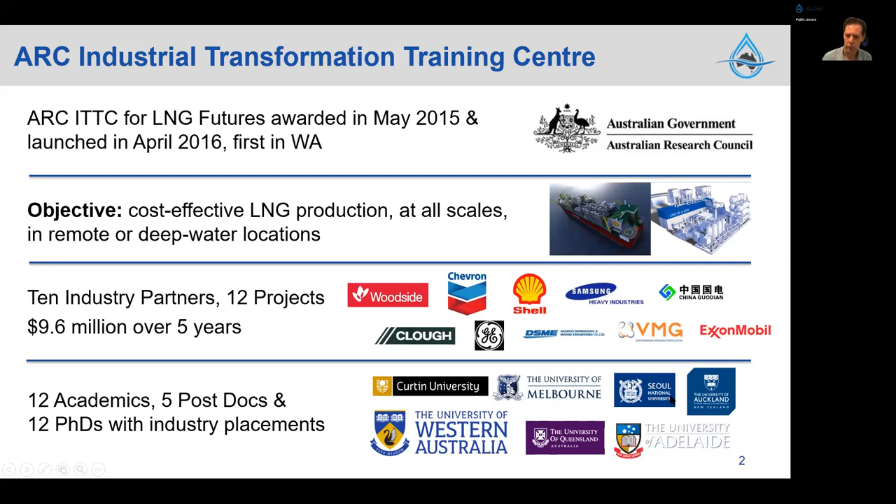Logos are shown here, including a few from overseas: Samsung Heavy Industries and Daewoo Shipbuilding from Korea in particular, and China Guodian, whose name has changed a few times since then but is effectively an energy company from China. We had quite a good collaboration across many Australian and international universities, including with Professor Vishnu Pareek at Curtin University, Professor Paul Webley at the University of Melbourne, Professor Andre Luton at the University of Adelaide, and Dr. Tom Rufford at the University of Queensland, plus Professor Yutaek Seo at Seoul National University and Professor Young at the University of Auckland.

A fundamental part of the mission of industrial transformation training centres is to produce industry-oriented PhD students, and the ARC includes funding for 10 12-week placements of PhD students with an industry partner each year. We decided not to just restrict it to the precise 10, but to actually expand it to a broader cohort of PhD students to maximize the industry training. This has worked quite well, and we've shared this model with the ARC, because often a particular student or a particular set of skills and the partner don't necessarily match at a given time. So having a broader pool is important.

Already we've graduated many PhD students, or those who have just finished or submitted, and a snapshot of some of them is shown here.

We did these 12 projects, and they were grouped into three themes. These were led by Professor Mike Johns and Professor Zach Aman at the University of Western Australia, and Dr. Kevin Li, who's now at the University of Melbourne, led theme 3.

The LNG industry is based on pretty well-established science and engineering, so making progress isn't simple, and you really have to go back and understand fundamentals better than has been done previously to make progress. And then the next important step is to demonstrate that new understanding translates to larger scales. The images shown here of our facilities try to reflect that process, as will the 2 examples I'll talk about this morning.

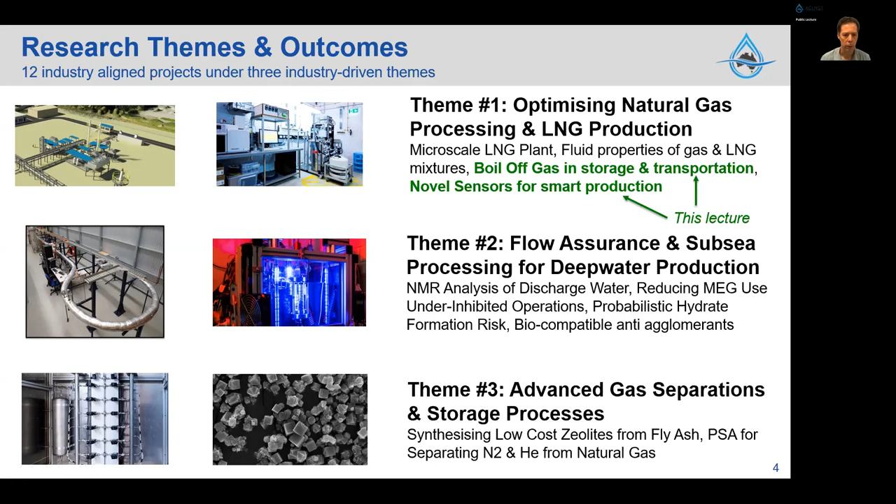There are a lot of projects, and they've all had very strong and specific outcomes that I think will make a material difference. Today I'm going to talk about just 2 of them: boil-off gas in LNG storage and transportation, and novel sensors, particularly for the detection of cryogenic solids in LNG production.

The LNG industry has been going for something like just over 5 decades now, and over that time it's grown exponentially, with recent growth spurts both initially at the beginning of the last decade in Australia, continuing now in the United States. Global capacity for LNG is something like 400 million tons per annum. Karratha gas plant effectively started its first shipments back in 1989, and now has 5 LNG trains and was Australia's first mega-scale plant.

Now we lead the world, just pipping Qatar in terms of about 80 million tons per annum of export. The growth in availability of cheap US gas has driven that second growth spurt, with the United States likely to be challenging for world leadership in LNG by the middle of this decade.

That cheap gas has had 2 big effects. First, the cost of gas, and particularly LNG, is now historically incredibly low, at the level of 2 to 3 US dollars a gigajoule on the spot market, and sometimes there's even been examples this year of it going negative as people couldn't find places to put their LNG. But it's also helped the US in particular reach its emissions reduction target, as people have transferred to gas as a clean baseload fuel that has half the CO2 emissions.

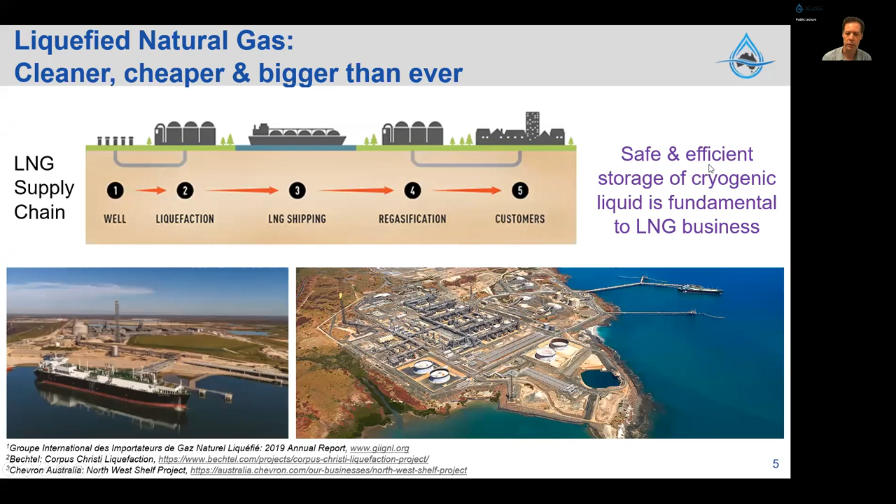And it's not just for electricity generation, it's also very important for heating and industrial power, as well as transport fuels. Remember that electricity only is about 1/3 of all energy use. Fundamentally, though, the safe and efficient storage of the cryogenic liquid is a fundamental technology upon which the LNG business is built.

And there are many different scales of storage. The ones I've just shown are the biggest, but if you're using this as a transport fuel, for example, or to power a remote mine site, you might be looking at a smaller scale, which might have LNG under quite a bit of pressure relatively.

It's very important, the larger the scale, that you minimize what's called boil-off. Fundamentally, what a cryogenic liquid wants to do is to change its phase back into a gas. Heat will always come from the environment to try to warm it up, and then it will boil. So the challenge is what do you do with that?

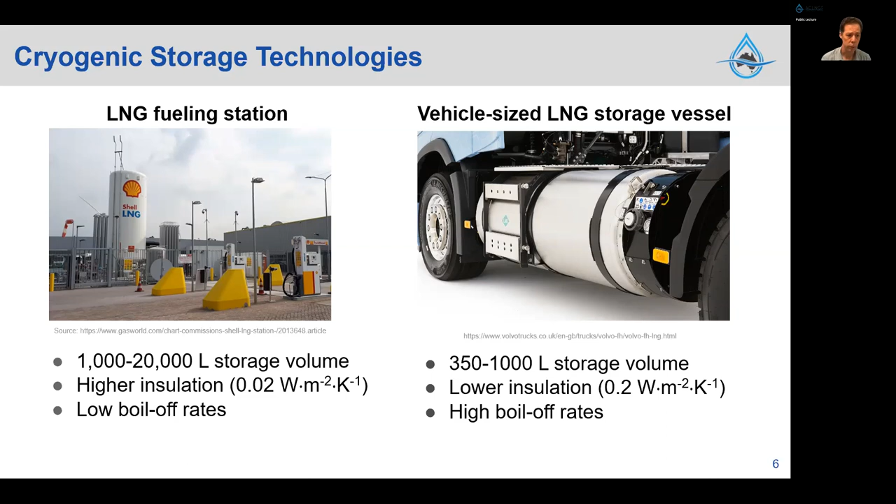You might think we understand boiling liquids pretty well, but it's particularly complex for LNG because it's a mixture, and the composition changes that occur as it boils off actually influence its properties very significantly. Another thing to keep in mind as you go to even smaller scales is that the costs of boil-off and the costs of minimizing it vary greatly with scale. So you need a general ability to describe what's likely to happen in various scenarios, not least of which to design the safety systems accordingly.

The liquid normally should have convective cells where any heat is causing the fluid to be well mixed. There's an inherent boil-off of the gas, producing a particular rate. But especially early on, what can happen is that the heat needed to boil off the LNG at the interface is drawn from the liquid closest to that interface faster than it's actually entering the tank from the environment. This can lead to what's called stratification, where the top layer is actually cooler than the bulk. What this does is it actually reduces the rate of boil-off gas production, which is good in some sense.

It seems like we're not losing anything, but in the end, you can pay a price for this in many different ways. One particular phenomenon that's bad that people storing LNG need to pay attention to is known as LNG rollover. It also occurs in salt lakes and things like that. But in LNG, it's bad because it generates large amounts of gas that have to be handled by safety systems, which obviously don't like that, and it can have environmental consequences also.

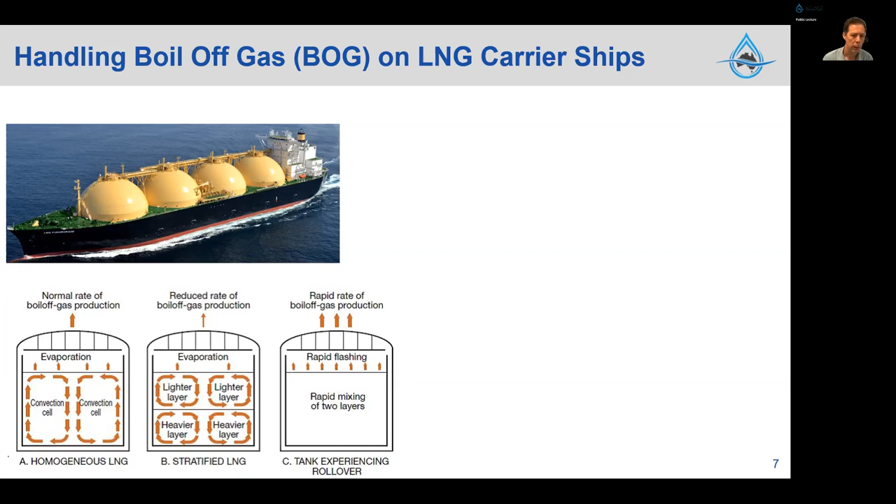The key question that companies like Samsung want to know is about this critical piece of information called the boil-off gas rate. If you look at where it comes from in the design of these ships, it's entirely empirical. For different fill levels and different tank pressures, the vendor of those tanks provides charts which give you a boil-off rate. There's no computer model that people trust enough to be typing in and generating the numbers.

And that's because it's a complex and scale-dependent process. It's hard to model, and it's also very hard to measure accurately, which is why, particularly at large scale, perhaps no adequate tool is really available.

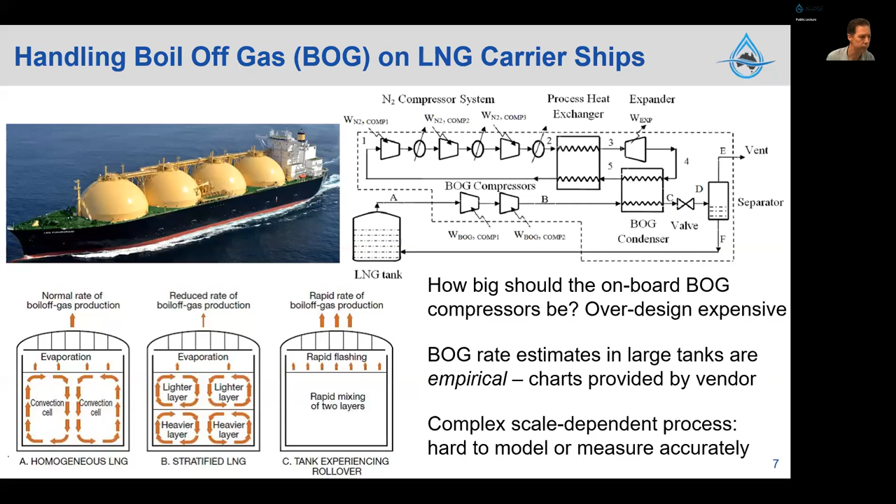So we set about designing and building a test facility at UWA for this. There have been many attempts at modeling, often involving CFD, but this doesn't properly handle the thermodynamics of that phase change, which is so important.

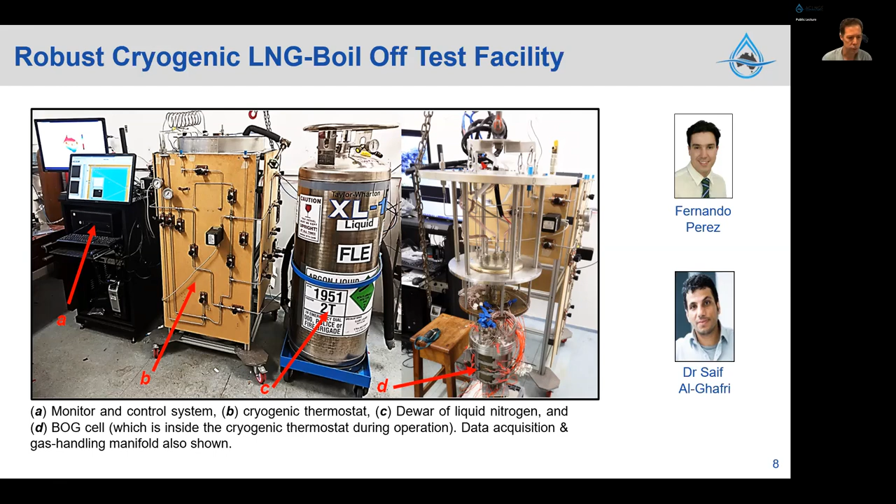This facility was built by a PhD student, Fernando Perez, now working with Exxon in Victoria, and Dr. Saif Al-Ghafri, still at UWA with us, to provide the high resolution data necessary to really understand all aspects of the phenomena. We've also had several visitors from Samsung Heavy Industries visit us from Korea and spend a few months in the lab acquiring the data with us.

For those of you that like detailed diagrams, this is one of the facility itself. The key point here is this boil-off gas cell, which is what we fill with the LNG. It can work at temperatures down to liquid nitrogen temperatures, minus 196 Celsius, and pressures as high as 10 atmospheres.

We have a relief valve which allows us to control whatever pressure is building up here, and this allows us to do tests. The cell is about 6.7 litres in total volume.

It can be filled directly, or we can actually liquefy gases inside if we need to. It has something like 35 sensors that protrude into the cell, temperature sensors, which allow us to measure not only the temperature profile in the gas and the liquid phase that's present, but also where that interface between the vapor and the liquid is.

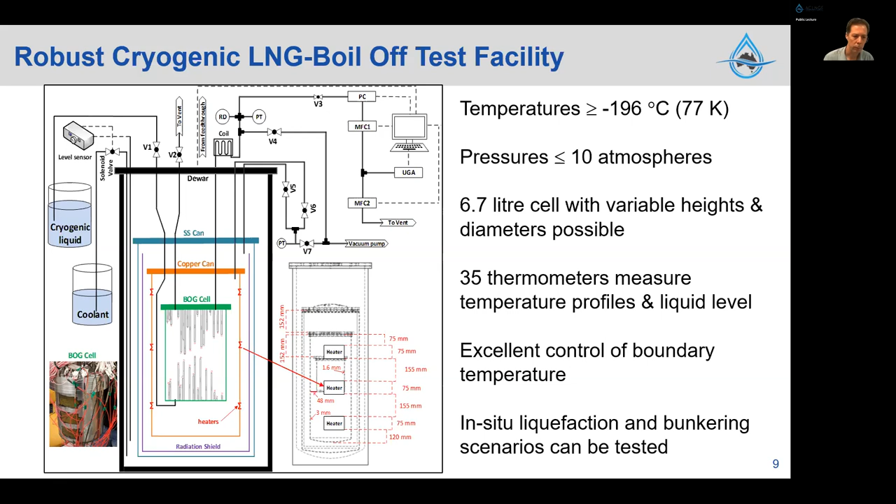And we have a very good control of the temperature boundary, through this copper can, which allows us to really define things very well and make sure our model of the system is working correctly.

When you do experiments, you also really should compare them with models to test that what you're measuring is sensible, and then ultimately be able to scale the results to other scenarios.

So we've designed this software package called BoilFAST, which contains thermodynamic models as well as energy and material balances and heat transfer, with only 3 parameters that describe how much heat flows in from the outside world. This allows us to calculate, as a function of time, either for the lab scale or for industrial scale tanks, what's going to happen in terms of the boil-off gas rate, the pressure build-up, and the composition of the remaining liquid, as well as its level.

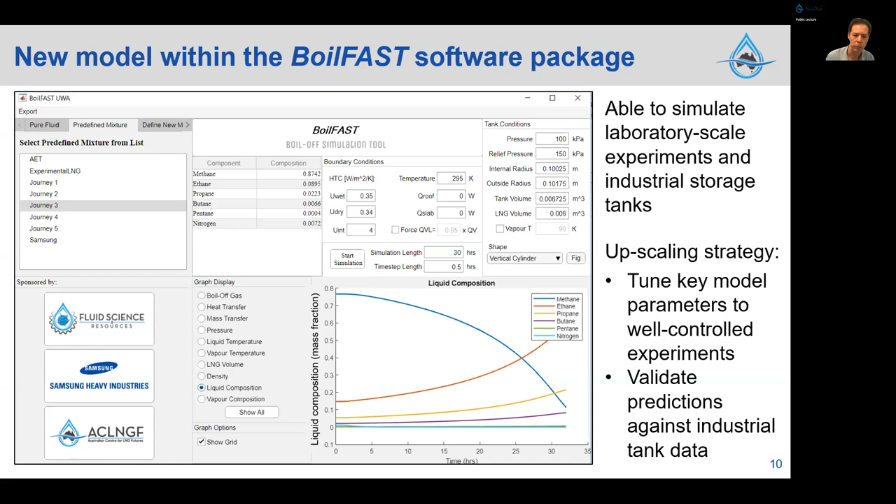You see this is part of our upscaling strategy. By doing well-controlled, well-characterized experiments, we can tune a very small number of parameters that have well-defined physical meanings, and then we can validate the predictions of those models against data measured in the lab, and then ultimately provided by industry partners.

The first step in this was making measurements of liquid nitrogen, and these are the results. Liquid nitrogen is simple because it's a pure substance. It's very well defined thermodynamically, and so it represents a very good way for us to tune the models and fix those 3 heat transfer coefficient parameters to force agreement between them.

It turns out that our handbook estimates of those heat transfer coefficients were about right, but particularly the one between the gas and the liquid phase interface was very important. Now, our model doesn't yet account for stratification, and that's why in these early phases you see a difference between, for example, the boil-off rates, but certainly it can describe the pressure buildup and the steady state behavior of the fluid.

And then the key point is to extend these model comparisons to tests of LNG mixtures with no further tuning allowed, no adjusting of those fudge factors, if you really want to convince yourself that you're measuring something, and predicting something that is real.

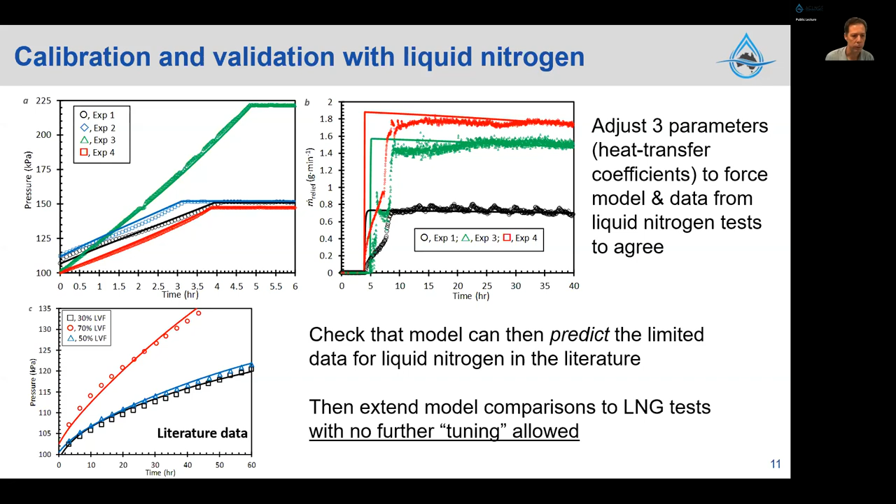Our data clearly show three phases of the boil-off phenomena: the pressure buildup or self-pressurization, a transient phase, and then that steady state condition. And it's during the first two that we can clearly see the liquid phase stratification take place, where boiling at the interface is borrowing heat from the liquid locally and causing its temperature to decrease relative to the bulk.

This stratification occurs and reaches a maximum, and that's when you see the boil-off rate slow down. Then once we achieve full pressure in the tank, it catches up and the liquid becomes homogeneous. So the data showed us that the various stages are intimately linked to liquid stratification.

Importantly, we also looked at the effect of nitrogen. Nitrogen is an impurity that is hard to remove from LNG, and some of it, like 1%, is typically dissolved in the liquid phase. But it's the most problematic component because although it's heavier than methane, it boils at lower temperatures.

So being able to predict and measure what's occurring in the LNG was a key achievement of the boil-off model.

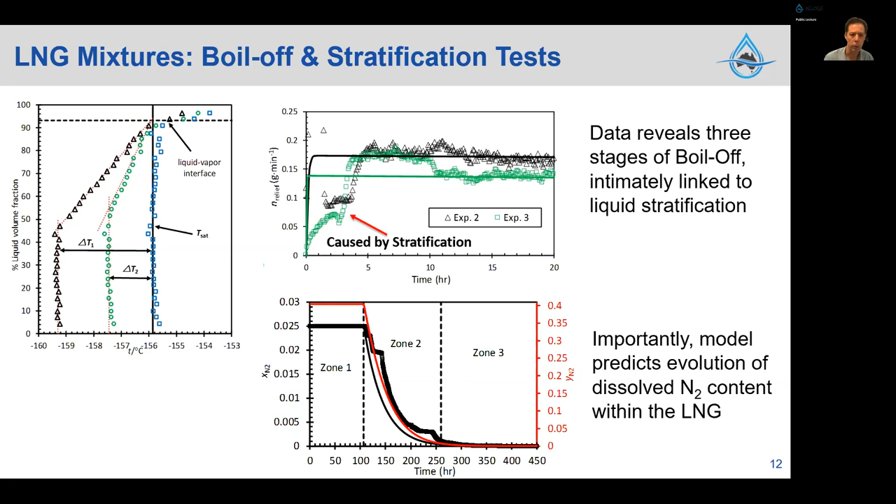And then finally, the acid test, if you like, was to compare the predictions of these models with a test done by our partner, and they used an 850 cubic meter C-type LNG tank that was on the ocean at 3 various fill levels. It wasn't an actual carrier, but a facility that our partner had that reflects what is likely to happen. And the model did, although it's a very simple model, the scale up was successful. The biggest error being for the lowest amount of liquid, where the change in pressure is smallest.

So this was a very encouraging result, and we're conducting future research to capture that liquid stratification with the next generation model. In the meantime, we've taken BoilFAST and even applied it to see if it works to describe the boil-off of liquid hydrogen.

There is some open data in the literature, for example, from the US Department of Energy, Lawrence Livermore National Laboratory, where they had a test with a 12.5 cubic meter tank of liquid hydrogen. And with no fitting, the model was able to predict the volume decrease as a function of time very accurately.

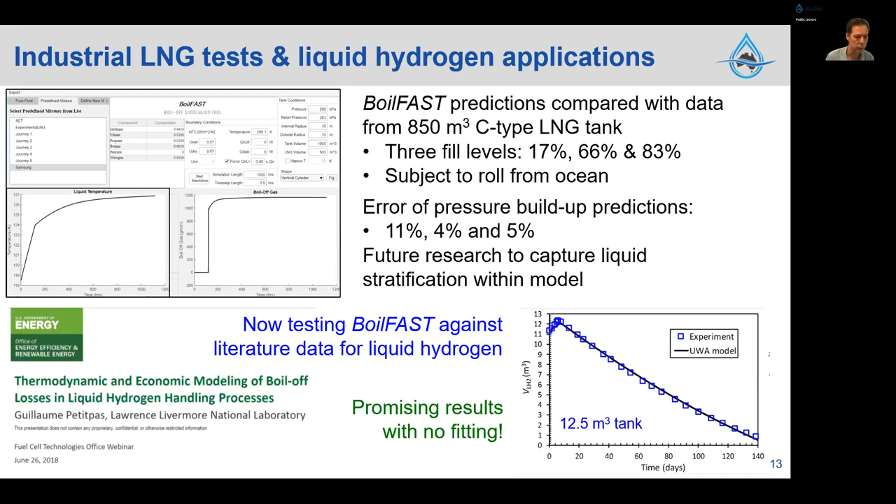So this is encouraging, and it shows the versatility of the model to go beyond the original application towards the description of other cryogenic liquids of industrial importance.

I'm now going to turn to the second research outcome from the ARC Training Centre, and it's motivated by the opposite problem to the boil-off case, and that's the formation in the liquid not of a gas phase but of a solid phase.

People are all familiar with, and there is an analogy here with, heart attacks, where the flow of blood is blocked by solids, heavy compounds depositing and ultimately occluding arteries. That analogy helps me explain one of the major problems that can occur, and does occur, in large-scale LNG plants, more frequently than anyone would desire.

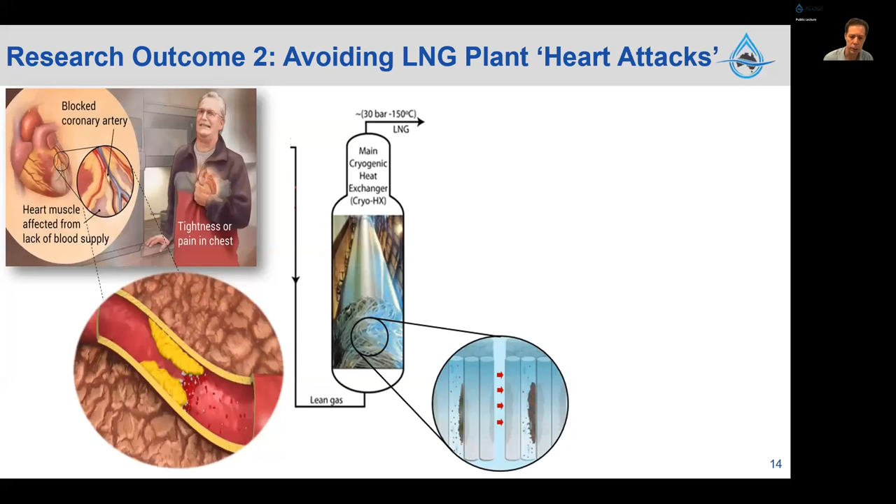A cryogenic heat exchanger is really just a bunch of tubes that are quite small, so that heat can be transferred from the refrigerant outside into the gas, and ultimately the LNG passing through these small bundles of tubes. Any heavy impurities, typically water, carbon dioxide, or heavy hydrocarbons like benzene, if present in too high a concentration, will actually deposit, build up, and block the cryogenic heat exchanger.

This chart, and the key diagram here is the yellow curve, which is the pressure drop across this cryogenic heat exchanger, is in some sense the signature of a heart attack in an LNG plant. It's very slow. The plant was operating normally.

This is from RasGas Train 4 in Qatar, and it was presented in Perth in 2016 at the LNG 18 conference. But they had a problem in August, and by December, the pressure drop was so big because of the solids depositing that they had to shut down.

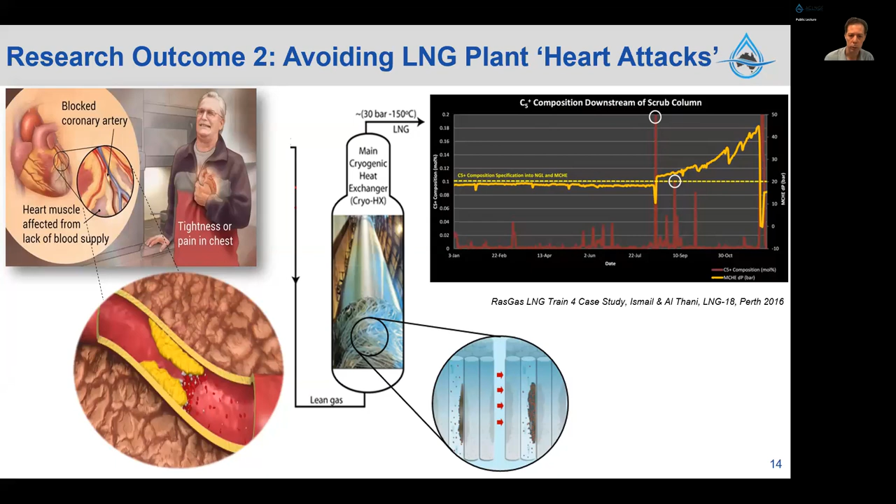And shutting down LNG plants is a significant economic penalty. You're going to miss contracted shipments, so the order of expense is at least on the order of $10 million at that mega scale. So our first strategy was to work with Chevron and the GPA to update the tools available to industry to predict the risk, in particular, of

these solids freezing out. And this led to our free software package called ThermoFAST, which the video is showing you how to use. We're pasting in there the composition of the RasGas LNG. We're generating a phase envelope, which many bits of software can do, but the key feature of the ThermoFAST tool

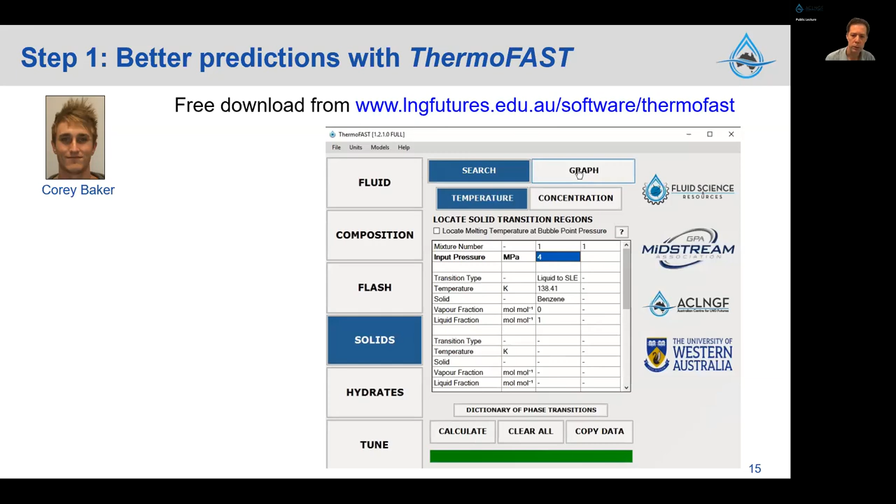is the ability, optimized to predict at what temperatures solid will form from the LNG. Every LNG is different.

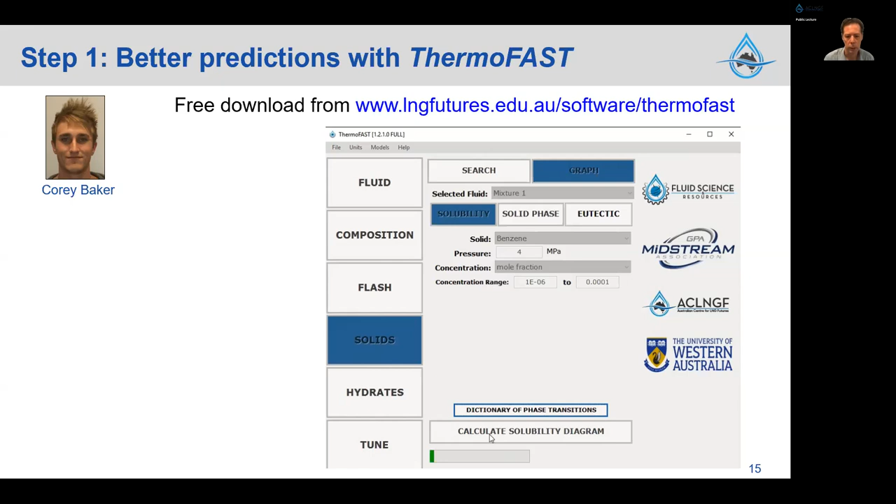The more LPGs or propane, for example, that it has in it, the freeze-out temperature for a particular impurity will also vary. There were data in the literature from the 70s, but the tools available were not particularly modern. With ThermoFAST, we were able to tune to that data, get a much better representation in a more general context, and even generate very efficiently so-called solubility charts for particular LNGs.

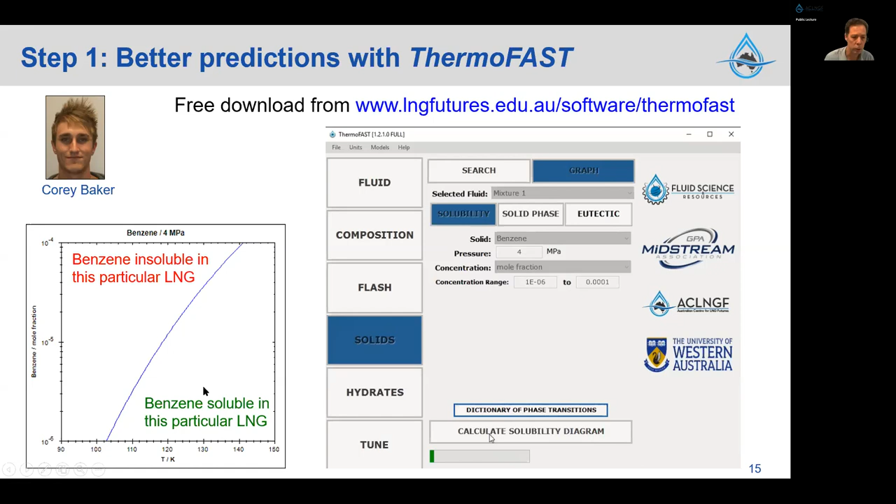This has just been calculated by the ThermoFAST program, and you can see if you're at these temperatures with this concentration of benzene in this particular LNG, the solid is going to come out of solution. So you want to make sure your operations stay down in this region.

But having a model is fine, you also need new data. So we set about experimentally designing systems that would allow us to visualize the freeze out of these solid impurities. Our first version of this has done a significant amount of work generating new data that helped improve the models in ThermoFAST for industry's use, looking at methane, benzene, p-xylene, neopentane—basically systems for which the data were either inconsistent or didn't exist at all.

The basic idea is we have a high pressure sapphire cell which we fill with the LNG, and a copper tip protrudes into the fluid, which is being stirred by this stirrer. The copper tip is cooled relative to the bulk fluid, and this causes solid to come out of the solution when you reach the solubility limit.

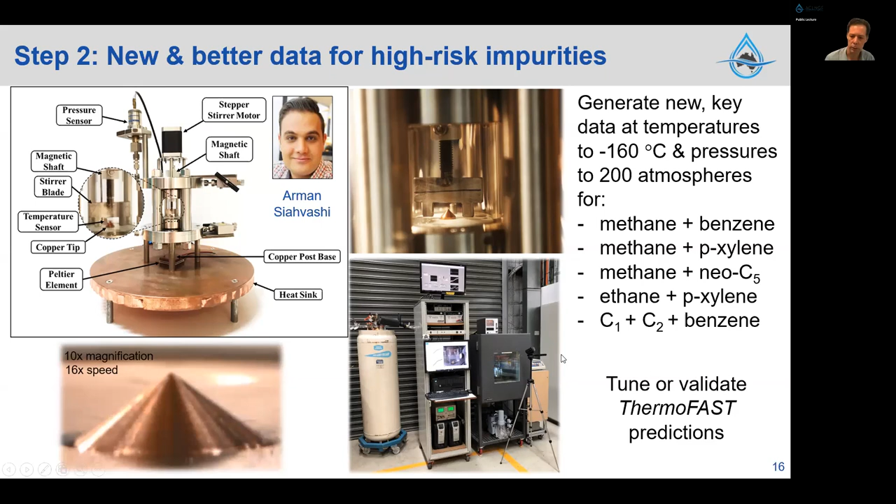We can then reverse the temperature of the fluid on the copper tip and measure when that fluid melts. What you're seeing here is actually there is a difference between the freezing temperature and the melting temperature of a solid, which is important. The melting temperature is what models like ThermoFAST predict. So this allowed us to tune or validate ThermoFAST predictions.

One of the most surprising results predicted by ThermoFAST—we first saw this coming out of the model and were wondering if there'd been an error in the coding or something—is this phenomenon of retrograde freezing. That means you've got a fluid mixture and a solid present, which is bad. Normally people would heat things up to get rid of that solid. But actually, in certain LNG mixtures, you can cool it down and the solid will redissolve. So this video is going to show that the phenomena that was predicted is real.

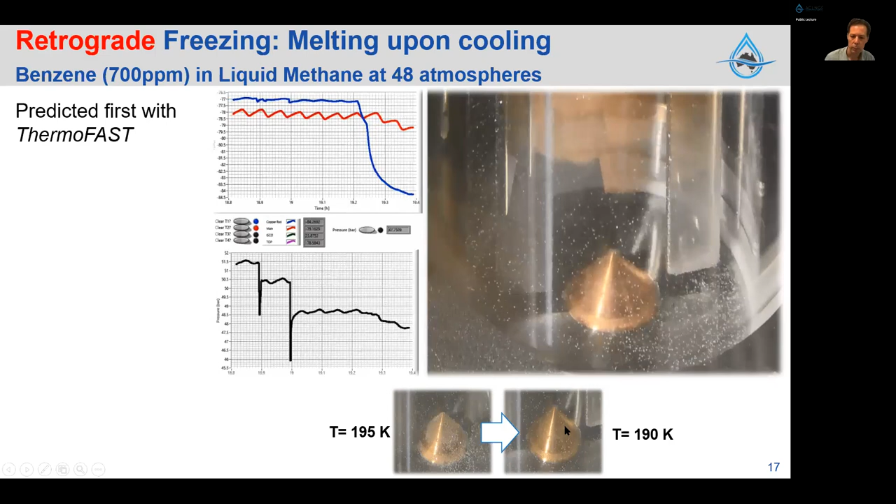Here we have the copper tip. It's a little bit difficult to see, but you can see that the temperature of the copper tip is cooling, it's dropping. If you watch the surface carefully, you'll start to see particles and the film of solid on that tip disappear once the temperature stabilizes. There's specks on the window in front of it, but you can clearly see the before and after picture of cooling validated that prediction from ThermoFAST of retrograde freezing.

And so potentially—this is a bit speculative—this offers another operational strategy in some cases to consider when trying to fix blockages.

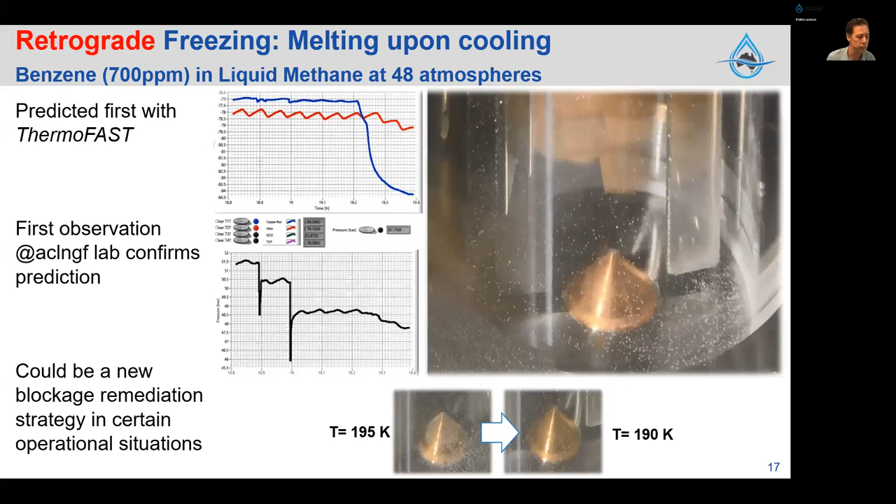But we also realized that to look at very low concentration systems like those found in industrial plants, and to examine the kinetics, we needed better resolution. So we've since built a CryoScope facility. Aman Siavashi, who built the primary cell, also helped a new PhD student, Catherine Sampson, and research fellow Dr. Peter Metaxas design this CryoScope facility.

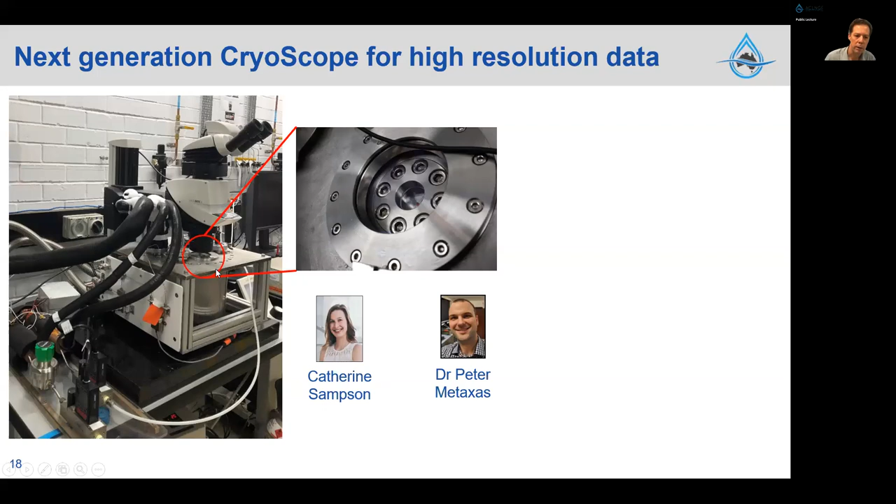Essentially you have a high pressure cell that's got a sapphire window. It's inside a vacuum can, so we can get it to very low temperatures, and we're looking at it through a microscope. We have, again, a copper tip, which allows us to cool that liquid relative to the bulk. It's being stirred—you can't see the stirrer, it's off camera. But as that copper tip cools, you can see the benzene here coming out of solution.

So we're tracing this pathway into the phase diagram, and the solids are coming out at these temperatures. This really gives us a sense of the morphology, the kinetics of the growth, and then allows us to derive a deeper understanding of what's likely to happen if this problem occurs.

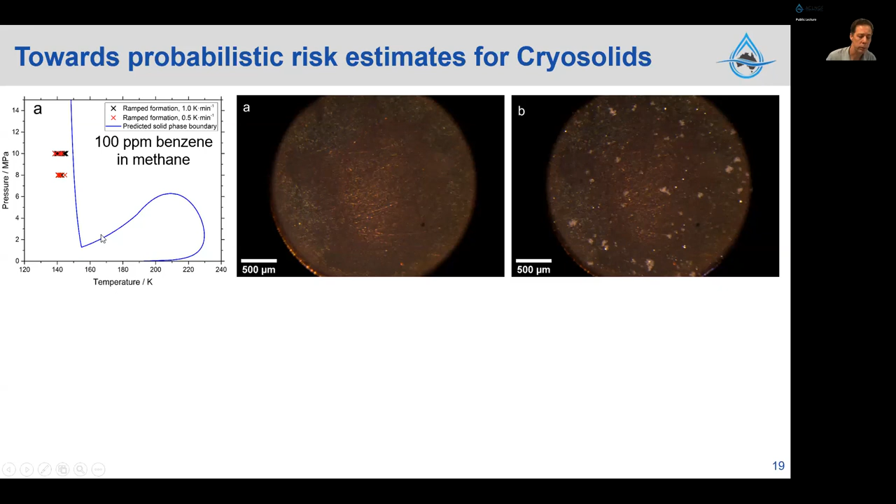Recently we've been looking at experiments with 100 ppm benzene in methane. What we really want to get down to is about 10 ppm benzene, and that is possible. These are still images now, before and after, at 500 microns in the scale bar. You can see these small specks of benzene coming out of solution. If we repeat this experiment often, we see that the formation occurs at a particular subcooling compared to the predicted equilibrium boundary.

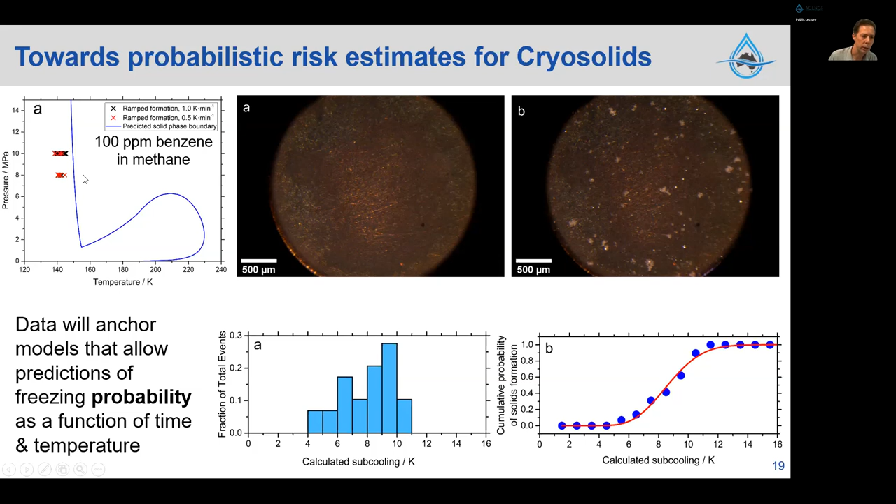And that allows us to actually build up probability distributions relating to the nucleation sites and the subcooling required to cause the solids to form. So we can generate probabilistic models to predict the risk, with an actual probability as a function of how low below this melting temperature the cryogenic heat exchanger might have been, and how long the fluid has been within that phase boundary region.

So finally, I'd like to talk about our third step, which is to develop an automated sensor for better LNG plant operation. While the tools I've just shown you are good for the lab, they're not particularly applicable for use in a plant. Windows in particular get fouled and you'd need someone interpreting the data. Currently, plant operators use just a composition analysis, which is a relatively low resolution measurement, so it doesn't even distinguish benzene from something with a similar molecular weight like hexane, to calculate whether or not there's going to be a problem.

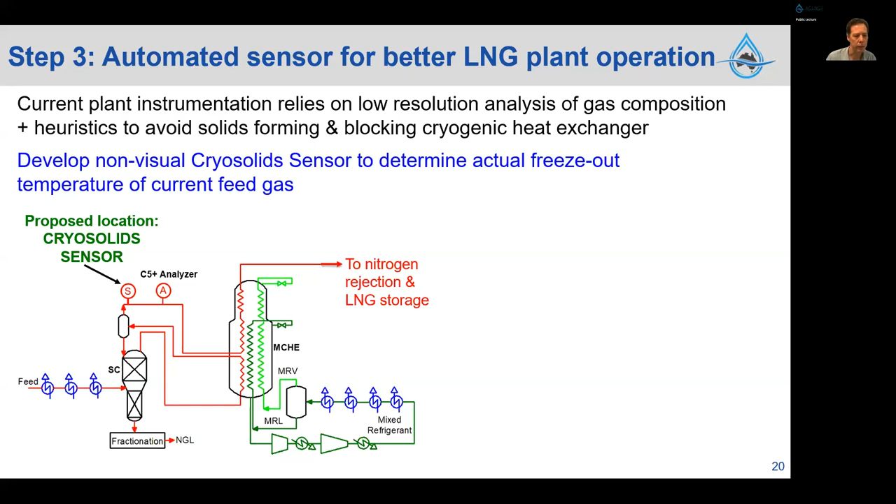Here's the cryogenic heat exchanger in the LNG plant, and the gas problem occurred in this cold bundle up here. So these heuristics are quite limited. Our concept was, why don't we develop a sensor that is non-visual, that is robust, and can be put upstream of the scrub column where the last separation of heavy hydrocarbons occurs, and it'll measure the freeze-out temperature of the current feed gas in real time. You won't have to use a model with poor compositional information to try to predict if and when there's going to be a problem.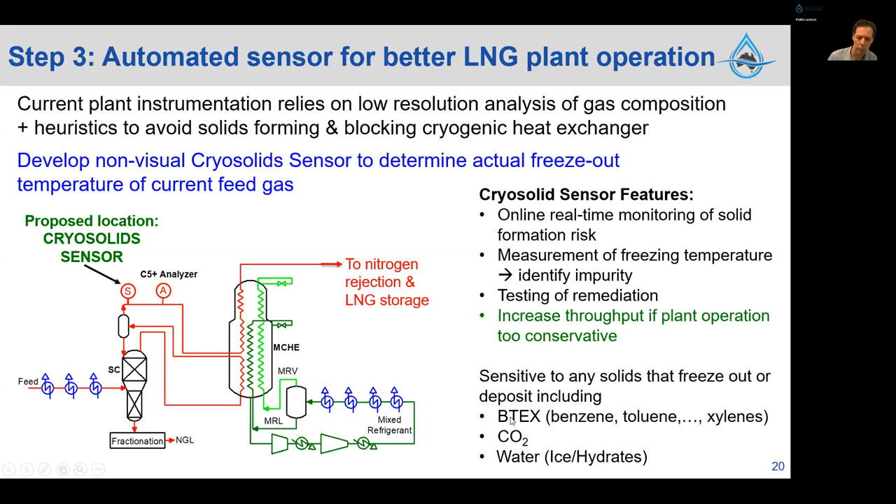In addition to this real-time monitoring, from the freezing temperature you detect, you'll be able to know what the highest concentration or problematic impurity is, and you'd be able to use that sensor to test remediation strategies like dosing in a little bit of LPG to help redissolve the solid. It's not just about protecting against a negative - you can actually increase the throughput of the plant. You can process more gas if you can show there is no risk of freezing out using a sensor, because the processing is adequate. Or you can reduce the energy spent removing particular impurities, either in this unit operation or earlier ones. So we need it to be sensitive to all and any solid that can freeze out, including the most problematic ones, which are benzene, CO2, and water in LNG plants.

So we've developed a cryogenic solid sensor, which is based on microwave technology. It's pretty simple in design, led by PhD student Matthew Hopkins and my colleague Dr. Paul Stanwix here at UWA. It's just a pressure vessel. It's got a copper cold spot, and then this reentrant cone that when you assemble the lid produces a gap. And that gap is where the solids are going to form.

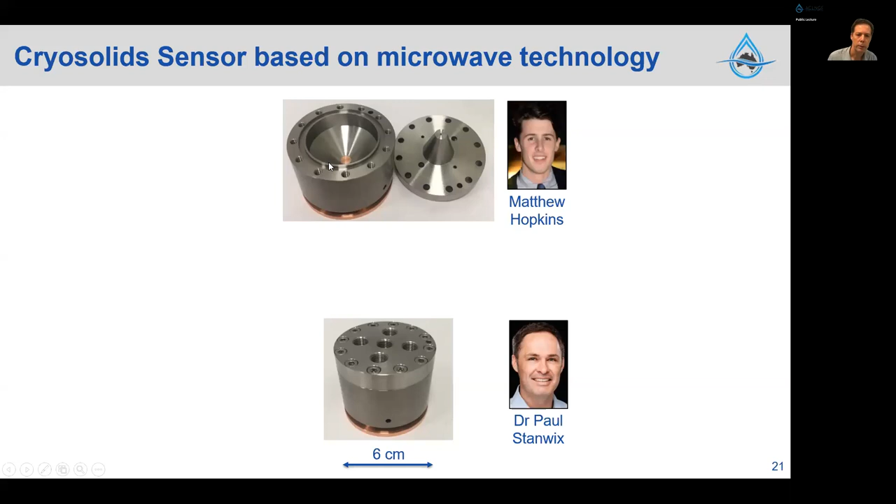Most of the space in the sensor is not doing very much, but what we can do, a bit like your microwave oven at home, is excite the microwave fields, and this geometry makes the fields very sensitive to the refractive index of whatever is in this gap. So if this cold spot forces a solid to form, the refractive index changes in this region, and unlike in your microwave oven, we're not heating the fluid - we're just measuring a frequency that allows us to know what the refractive index really is. We can see when that solid forms, and different solids have different refractive indexes.

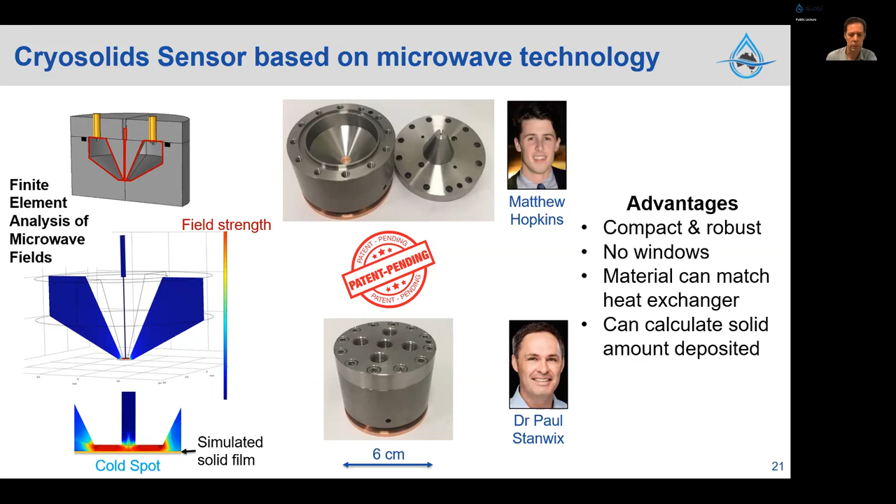This is a particularly useful design because it's compact and robust. There are no windows. We can match that material to be the same substrate as the material used in the heat exchanger, so it could be aluminium, for example. Because of the ability to measure refractive index, we can actually calculate the amount of solid being deposited as a function of temperature for a given fluid concentration.

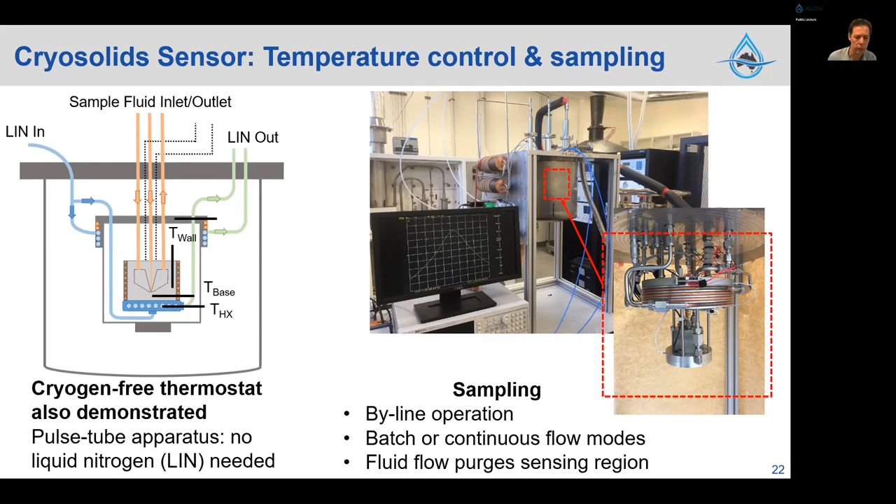So the sensor, we've built it, it's operating in our lab, and we can use it to test industry fluids. The mode of operation is by-line sampling. Here's the sensor itself - much of this equipment is to help cool and control the temperature, as shown in this diagram. The fluid comes in, it flushes out that spot, and can either operate in batch mode, or we can continuously flow the fluid through the sensor, purging continuously that region, although any solid that deposits sticks there and allows us to get even better signals over time. This particular version uses liquid nitrogen, but we've also developed a cryogen-free thermostat based on a pulse tube apparatus, so you don't need liquid nitrogen even to run this sensor.

And to just demonstrate some performance, here's CO2. We have 53 parts per million of CO2 in methane. ThermoFAST predicts the melting temperature to be around 99 Kelvin. It's a high pressure liquid. The yellow data is coming from our sensor, and this is sort of like a baseline.

It's a bit like taring your kitchen scales. You can choose the zero, but there's no question that when the solid forms, we start to see solid CO2 plating out in our sensor.

We can also do it with benzene at 100 ppm currently, now being pushed to lower concentrations. A very nice signal. Benzene doesn't have the same refractive index and tends to be a bit fluffier than CO2 solids, so it's sometimes a bit harder to see, but also we're getting quite large amounts of solid being detected.

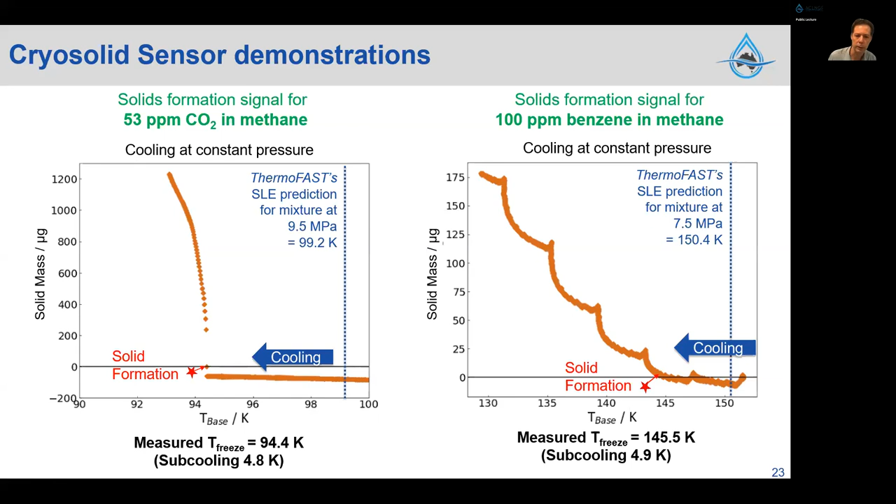With water, and this is very recent results, so we're still pushing the envelope here. These data are literally about a month old, and this is with 200 ppm water in methane. So really, this is actually quite a high temperature in an LNG context, but you can see that it's a very sensitive measurement.

And when we heat it back up, the hydrate melts at the same temperature as expected from the equilibrium prediction.

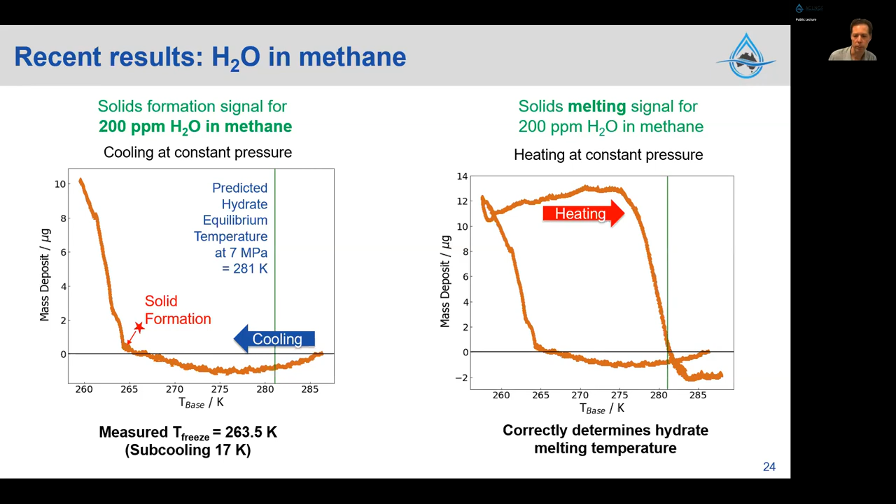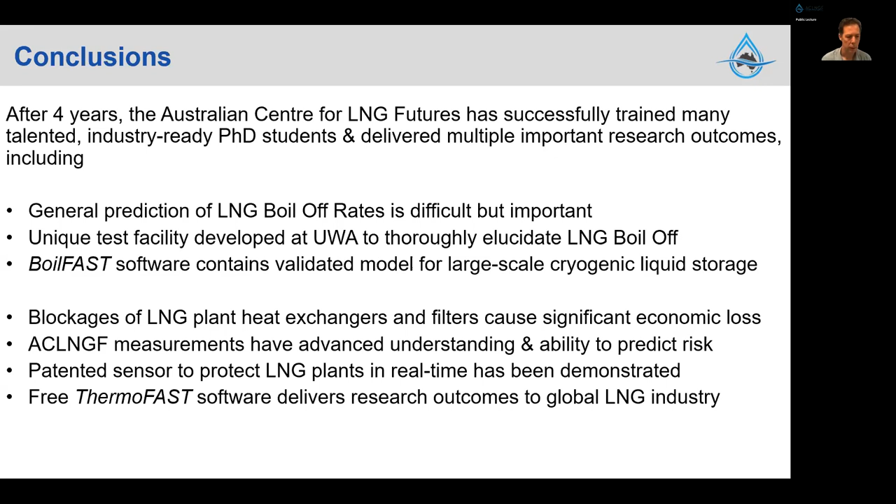So to conclude, after 4 years, the Australian Centre for LNG Futures has successfully trained many talented industry-ready PhD students, and we've delivered many important research outcomes. I've talked about two of them today: one relating to LNG boil-off and our software tools for describing it, and another relating to LNG plant blockages caused by cryogenic solids formation, tools for industry to use today, and a patented sensor to come in the near future.

Coming soon, as one of the things we're working towards, is a web-based version of ThermoFAST, so engineers and companies don't have to install software locally. IT departments are very strict nowadays, so having access to ThermoFAST on the web will be, we think, particularly useful.

And that work's been led by Dr. Peter Falloon. He'll be talking about it next week in our group seminar.